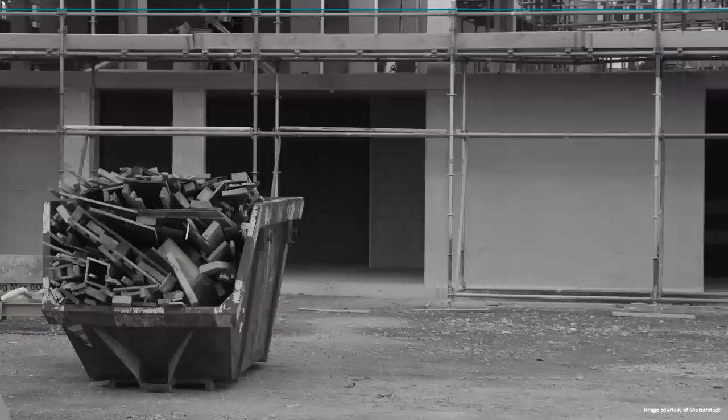As a result, our firm is often called a highly sustainable practice. And the truth is, it really isn't. In fact, I don't believe that word sustainable building or sustainable practice is really true in most cases. And the reason is the built environment uses an enormous amount of the world's resources, and far too few of those come from renewable resources.

In fact, the vast majority of the material that man makes on Earth goes into the built environment. The other challenge with buildings is they represent about 39% of our greenhouse gas emissions, or in North America, almost half of our greenhouse gas emissions. For reference, and because it's not talked about enough, all of cars, planes, automobiles, the entire transportation sector combined represent only about 23%. So buildings are a huge part of the problem and not discussed enough.

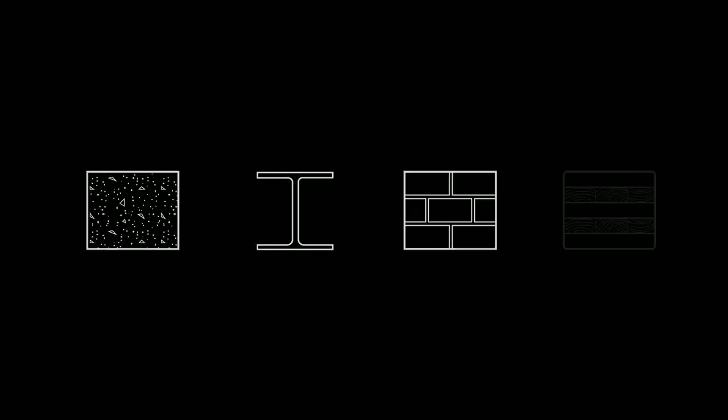The reason for that are both the heating and cooling of buildings, of course, but also the materials that go into buildings. So when it comes to materials, the building structures, what holds the buildings up, really are composed of four major materials in every city on the planet: concrete, steel, masonry, and wood. And of those four materials, three of them have very, very high carbon footprints, in particular concrete and steel.

Now, wood is the only material on that list that's also a renewable resource and sequesters carbon. So it's the only pathway as a material that actually can get us to carbon neutral buildings. And it's the pathway we choose in our practice to build all buildings. So our practice has been a timber-only practice since our inception.

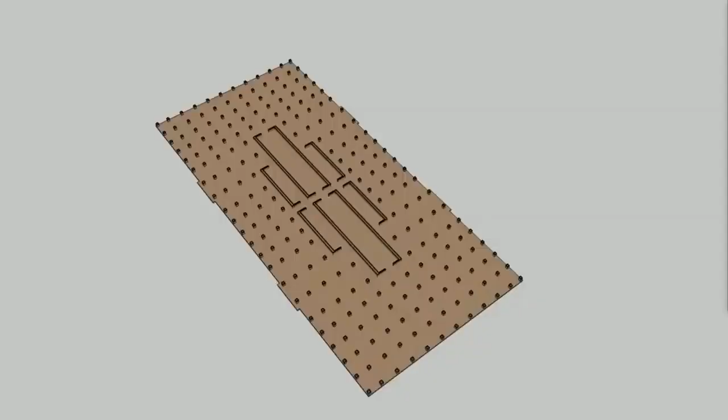And as part of our advocacy for the use of wood in buildings, about 15 years ago, I wrote a book called The Case for Tall Wood Buildings. And that book taught the lesson of why we should do this and how we should do this. And in the beginning, it was a very unlikely concept that people had a hard time believing. And yes, we figured out that we could have built the Empire State Building entirely out of wood.

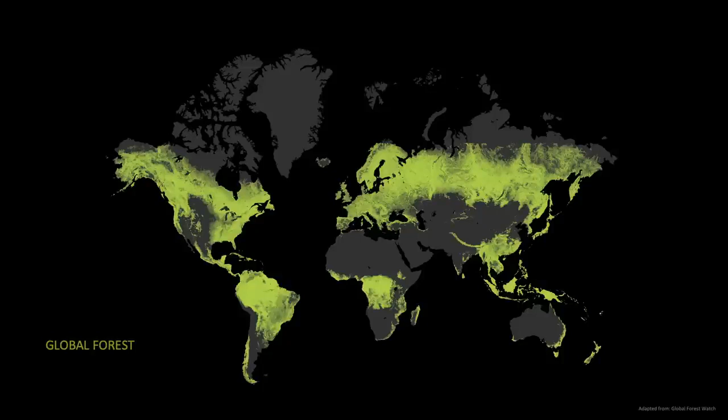That early idea now is a mainstream concept around the world in sustainable building practices, and there are hundreds of tall wood buildings that have either been built or are currently under design and construction, and thousands more to come. But wood as a sustainable idea is not sustainable unless it actually comes from sustainable forest practices. And much of the planet has forests that we actually need to keep standing as part of our climate solution. And in fact, lots of the world have forests that are under deep threat.

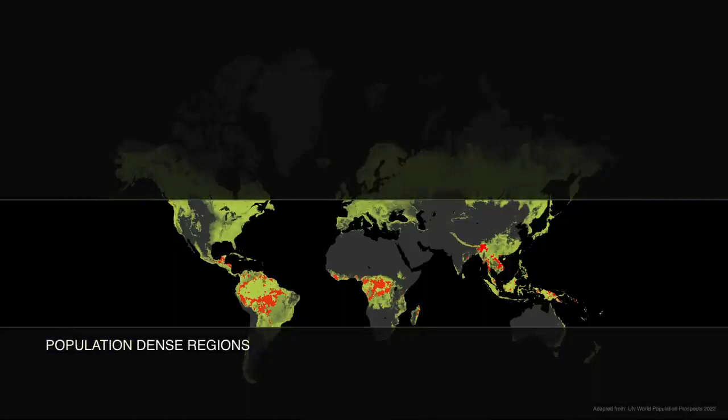If we think about where population in the world mostly resides and where it's growing the quickest, in fact, most of those areas either don't have forest or also are where these forests are threatened. And so wood, as good a solution as it is, and a solution that I still very much believe in, is not a global solution.

Most of our cities are still built in those first three materials: steel, concrete, and masonry, and they have a high carbon footprint. We're working hard, and people are working hard to make concrete and steel better. But unfortunately, tweaking those existing materials is making them only modestly better. In the case of concrete, it's estimated they can reduce the carbon footprint of concrete at best between 10 and 35%. And that's a long way to go from where we need to be, either at carbon neutrality in our cities, or better yet, in carbon sequestering, carbon negative buildings. So how do we get there?

After building about 1.5 million square feet of mass timber, I still believe in that material, but I keep asking myself this question: what is the alternative to the Big Four? And the answer in my mind, without question, is studying and understanding what's happening in nature and nature's structures, combining that with modern biotechnology, and combining that with all of the computer modeling that allows us to make incredibly efficient structures going forward. All those things together are creating what we call FIVE.

FIVE is a fifth way, a new structural material that will replace, in my mind, over time, the Big Four. It's an all-organic material made from forests and crops that can be grown all over the world. It's strong and safe, and it eventually will be cost-effective and competitive against any other material available.

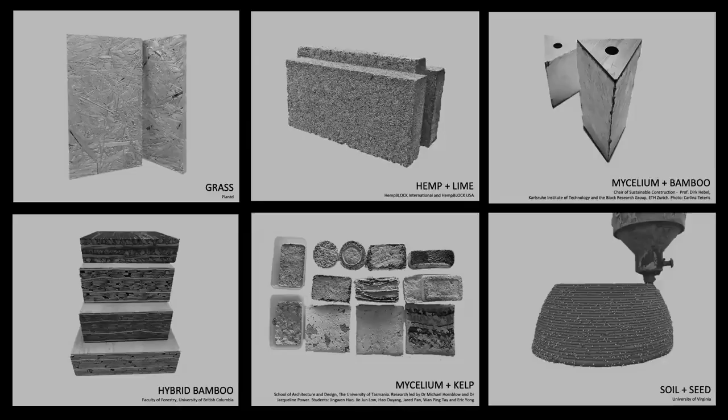Now, this isn't a new idea. Products made from natural materials, thankfully, are growing up everywhere. There's a huge industry of biomaterials in academia as well as in private business, and we're seeing new products come online every day. This community is strong and hopefully getting stronger, and our contribution to it is really focused on this idea of the biggest material use, which again is the building structure.

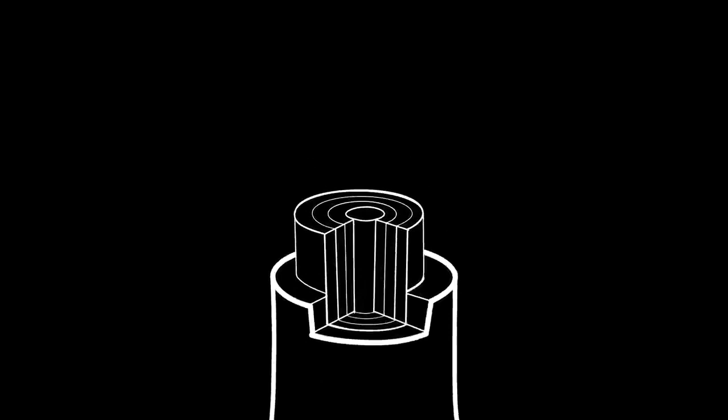So how does it work? The idea is based on the same concept of how a tree works or any other vascular plant. As we zoom in, a tree is sort of made of lignified tissues that go from the bottom of the tree to the top, as are plants. And those lignified tissues have within them in the cell structure cellulose fibers and lignin that together make the plant strong in order to grow and thrive.

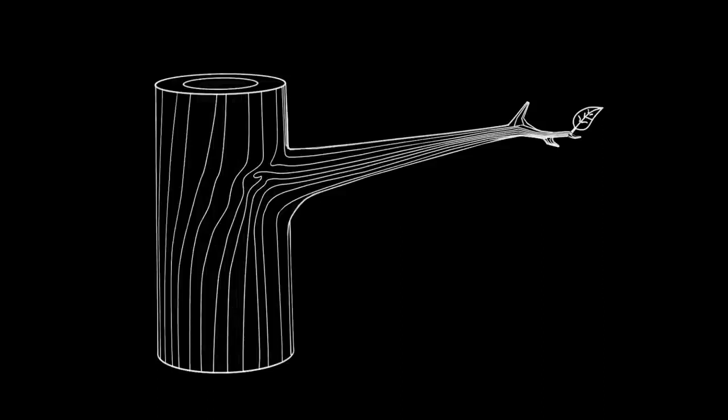And those two materials, the fiber in the plant as well as that lignin, as well as other binders, make up the ingredients of what we call FIBE. Studying the fibers and how they work in plants is another part of how we're trying to make this structure. And if we all imagine cutting through a branch, as the image just showed, we know that nature finds very efficient ways to create structures, and they're often round like a branch.

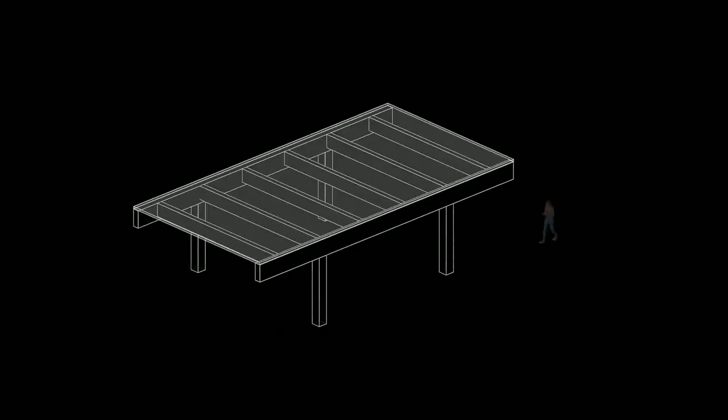But as humans, we tend to make boxy structures. And the reason we do that is concrete, steel, and these materials in wood are more efficient when we form them as a box or when we cut them as a box. It's more affordable, and that's why we see it. So a typical structure has columns and beams and a slab to make it up. And they're very boxy forms, as you can see in the image.

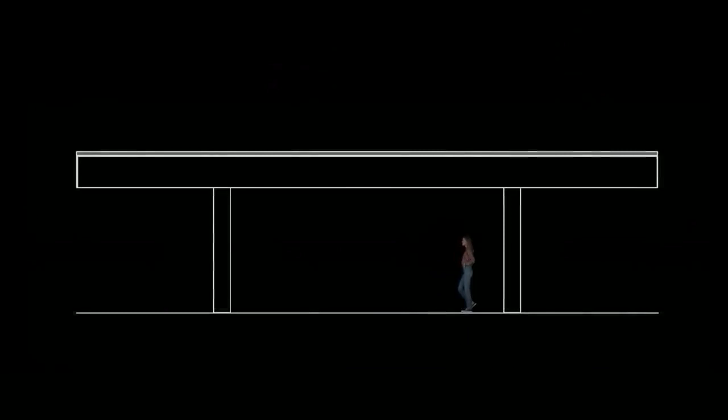Now, different structures behave very differently all the time. This particular structure is an example from a tall building, but if we were talking about a house, it would be a different structure, or if we're talking about a hockey rink, it would be another structure. So just in this example, how do the forces work? Well, you have the force of the weight of people, and you have the force of the weight of the building above. You have wind blowing on the sides or an earthquake impacting it.

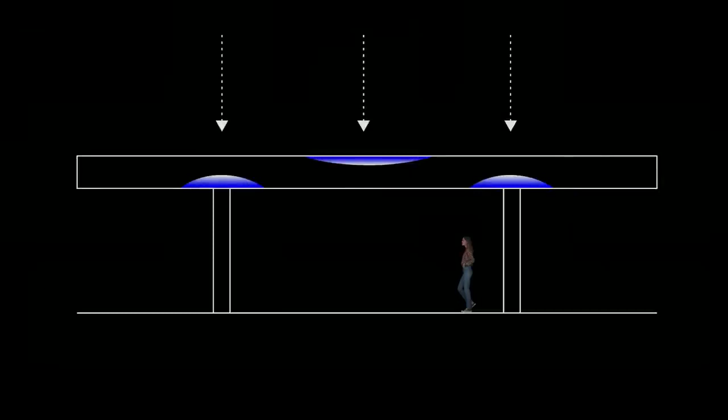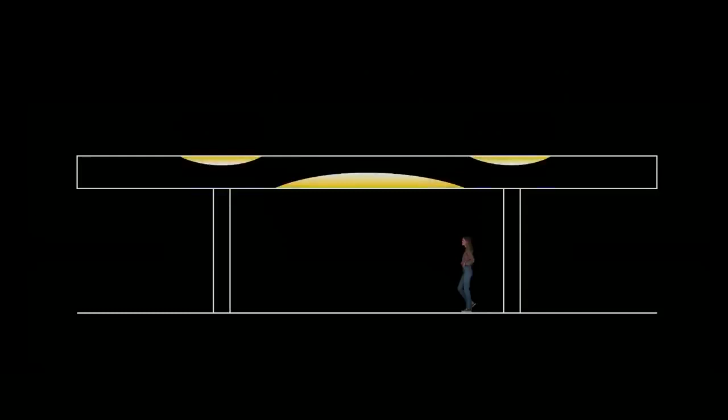The forces as they press down on this particular example in blue are forces of compression. That's the squeezing forces pushing down. And the forces here in yellow are the tension forces, the pulling apart on that structure. When we put those together, we see how the forces move to the ground through this simple frame. And it's sort of a flowing diagram. In fact, when we use what's called a structural stress plot, you can see that the form is very natural in its character. But as I said, we build things out of boxes.

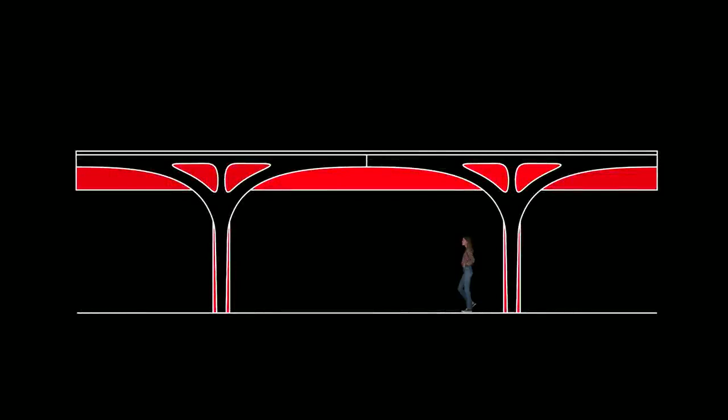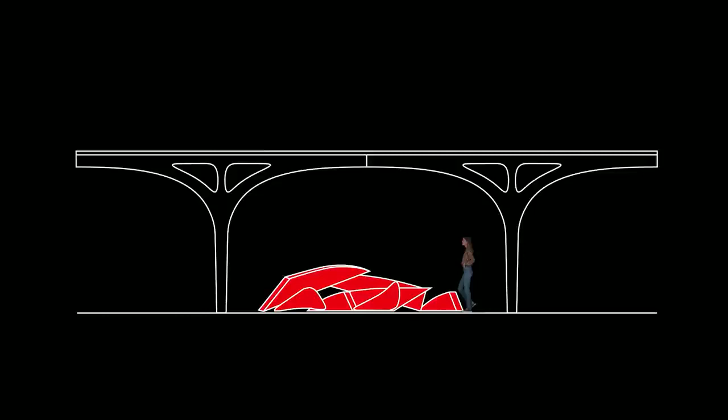And when we overlap, in our example, a boxy structure of wood, for example, we see these areas in red which really are unnecessary. They're wasted material in the current way we build. In this example, working with our engineers, we actually calculated that this particular example would result in about 27% material waste. Now, all buildings are different. It's very hard to make a sort of overall calculation. Some buildings are more efficient, some less efficient.

But if we multiplied this by the amount of building that needs to be built over the next 40 years for humanity, it's an incredible amount of human waste and poor use of our resources. So our goal with FIBE is how do we use as little resources as possible? And when you use little resources in a building, you lighten the building up.

And a lighter building actually means that it weighs less on the ground, and our foundations below the ground can be lighter as well. So less resources equals lighter buildings equals even less resources. Taking this idea of how we can use less, we took 4 existing known solutions and put them together.

The first is we take those plant fibers I described, and that can come from trees, that can come from plants, grass, bamboo. It can come from waste wood products. It can come from clearing the understory of a forest to make it less likely for forest fire in places like California. We take those fibers and combine them with other organic binders and lignin in order to sort of create a solid product. And then we take these computer models that allow us to really design efficiency into the way we build so we can boil out all that waste.

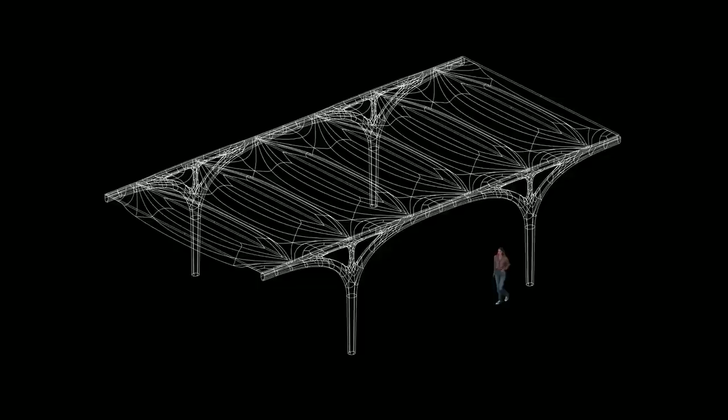And then finally, we're going to use custom robotics. That means that every part of a building, rather than being cookie cutter and the same and wasteful, can be just as much material as needed and no more in order to make the building safe. Together, that makes something that looks like this. And again, this is an example.

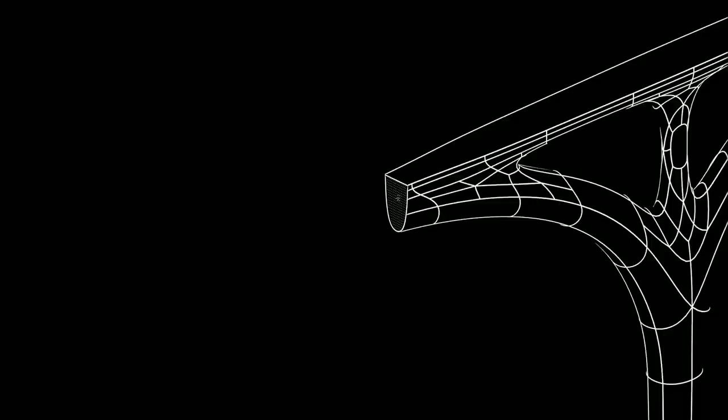The flat top is flat because we walk on floors, but underneath, the building looks more organic in its shape. And as you can see, these beams and columns feel a little bit more like branches and more like what we see in nature. As we zoom in even further, we start to see how it's actually composed. And you may think in your mind, is this fiberboard, is this particle board, things you've seen before?

Well, actually, what we're talking about is a very microscopic layering of these plant fibers. They're just 1 millimeter long. By laying them together and cross-laminating them across each other, we can customize, based again on the structural model, exactly how the composition of each piece of the material works in order to make it as efficient as possible.

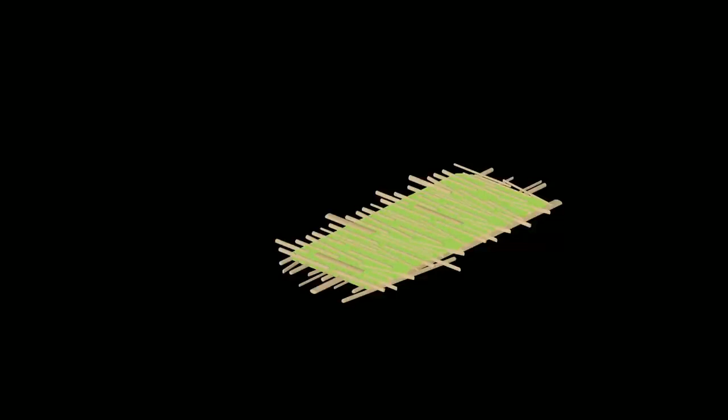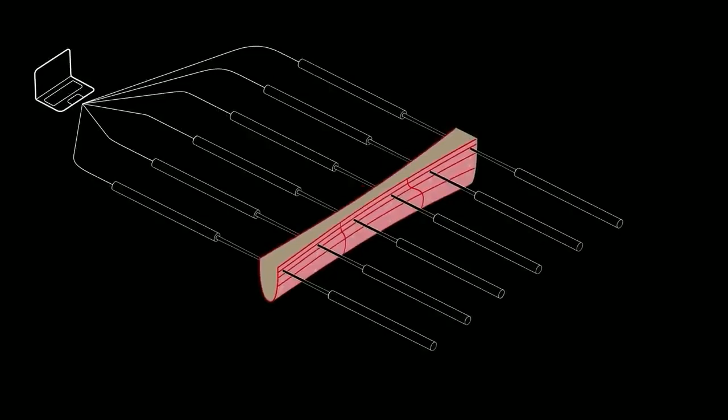We combine it with these organic polymers and lignin, and ultimately make this material as strong, dense, and behaves much like a tree would. Now, we do that in another unique way in the way the forming works. Because no pieces of a structure have to be the same and we want to reduce waste, we use robotic forms and fabric forms. The red is fabric that moves in and out and allows each piece of the building to be completely uniquely customizable. And again, we're using it to reduce the waste of a structure.

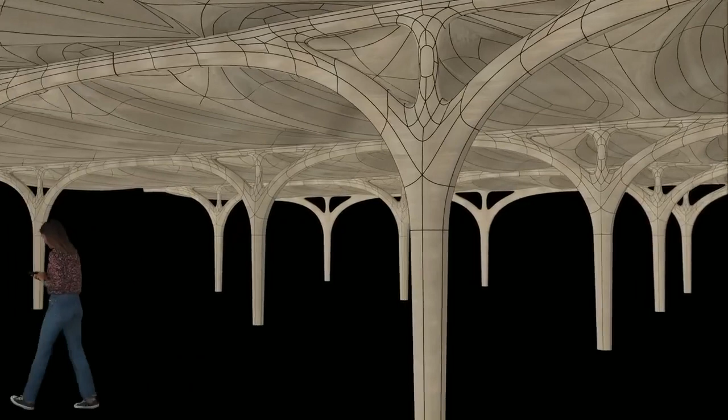Now, when we put that all together, it looks like something completely different, something that none of us have seen before. It's not like steel, it's not like concrete, and it's not like wood. Instead, in this example, what you see is an entirely plant-based structure. It's healthy and beautiful to be around. Its shapes are not there as decoration, they're there as just structural essentials, and yet they're beautiful. It's safe to be within. It sequesters carbon, so it's part of our solution for climate change.

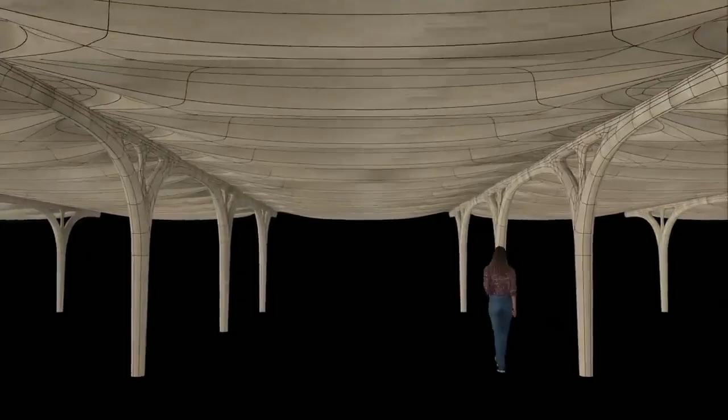I believe we cannot continue to work with broken systems and try to make them better. We have to imagine something next. We also can't wait for the world's resources to run out before we imagine a future that's different. We are no longer part of an industrial revolution of materials. We are at the beginning of Mother Nature's revolution of materials. And as a result, we can make much more beautiful environments for everyone.

As I walk around the forest of my home and I look up into the trees and imagine what the buildings of the future are, I imagine that they'll use less resources, they'll have less impact, they will still make strong, healthy communities for all of us, but they'll do so more efficiently. All of these ideas are ideas that already exist. There's nothing new here. We have an opportunity to live in a completely biological world. We just have to decide to do so.

There is a community growing of companies and products of biomaterials that are available. And every day there are new materials introduced into the system. We can and we will solve this combination of human need and the planet's need at the same time. All we need to do is listen to nature and let her teach us how.